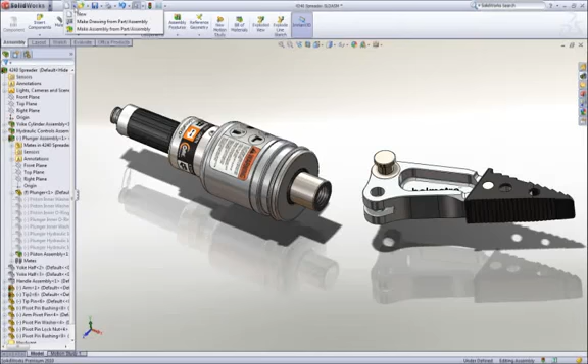The basic building block of a 3D solid model is a sketch, and sketching in SolidWorks is extremely easy and intuitive. Using a mouse gesture, I get access to my most commonly used commands. Draw a slot, add some dimensions to establish its size, and then drag the center of the slot onto the origin to locate it.

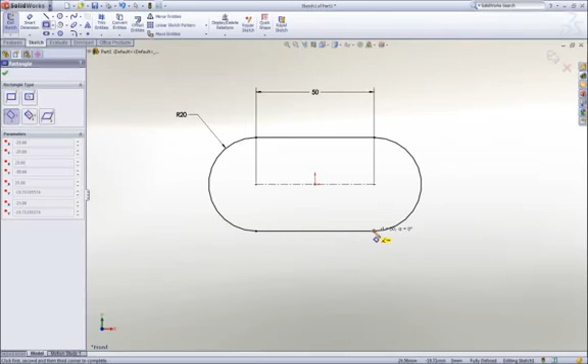Next, a rectangle is drawn using one of the many sketch tools, and then we add a couple of circles to hold the link pins. The two circles should be the same size, so a quick window selection reveals a pop-up toolbar, and an equal constraint is added to lock their size together.

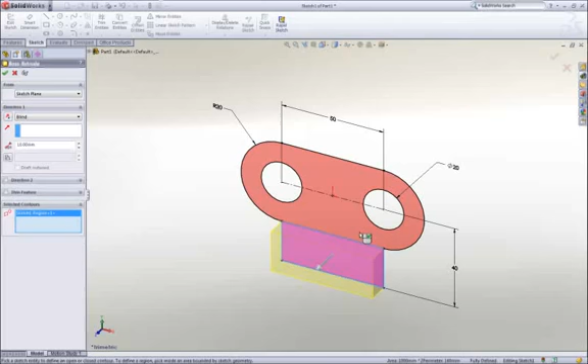Notice that as I work, all of the commands and tools are right at my cursor. We call this our heads-up user interface, which is designed to keep your focus on the screen to make you more productive. Now that this 2D sketch is finished, let's make it 3D by extruding it.

It can be extruded in either direction, or in this case we will extrude it 40 millimeters, about the midplane. To smooth some of the sharp corners, we can add some fillets. Their size can be graphically manipulated on screen, or we can key in a dimension to add some precision.

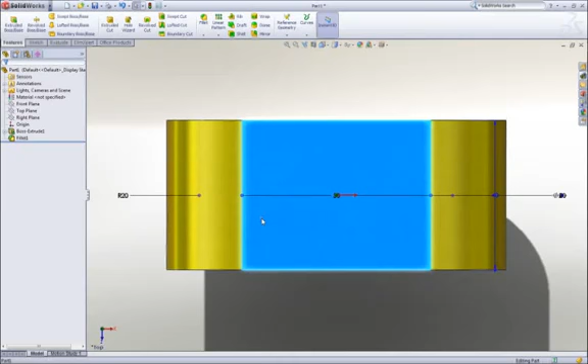Let's add a pocket to the center of the part to accept some links. This time we will use a center point rectangle to capture symmetry while we sketch, and a dimension to control its size.

Using Instant 3D technology, we can add material by dragging the sketch away from the part, or remove material by dragging into the part.

The sharp corners at the bottom of the pocket can be rounded by adding another fillet. 2 millimeters would be good.

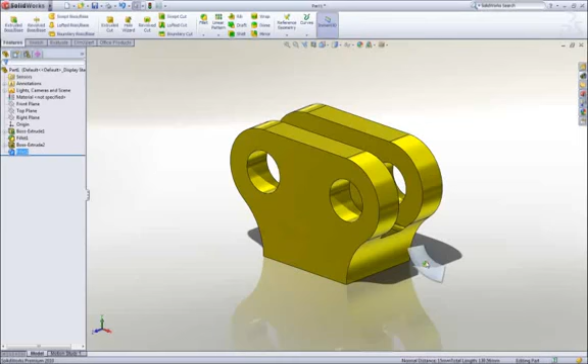Finally, we can ease the outside corners with a chamfer. Using the on-screen feature callouts, we can easily control its size while we create it.

Now that you have the hang of it, we will jump ahead a couple features and add a tapped hole at the bottom using the hole wizard. Gone are the days of looking up hole data, because all of the hole types, standards, and hole sizes are available. Choose the hole parameters, locate it, and SolidWorks takes care of adding all of the proper information to define the hole.

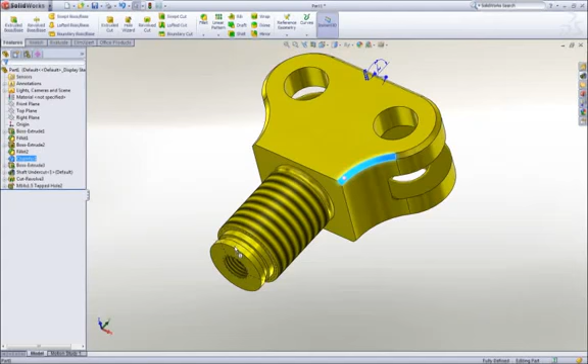Let's leverage our previously created chamfer by dragging and dropping it onto the bottom edge to make a copy. The part looks good, but maybe a couple of changes would help to refine it.

Changing the dimension value changes the geometry, and using Instant 3D technology, dimensions can be dragged and we get real-time feedback of our change. It's important that we fully describe our part beyond just the geometry.

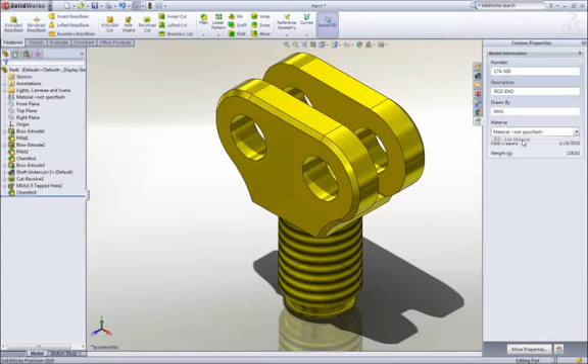Properties such as part number or description can be added and leveraged later in the drawing title block and BOM. Materials can be applied from a list of favorites or from a broad database of materials. All visual and mechanical properties are applied. Notice that the weight of the part has been updated to reflect the new material.

To document our design, let's create a drawing. SolidWorks displays the default views of the part in the View palette. We simply drag a view onto the sheet, then we can create any desired projected views, including an isometric.

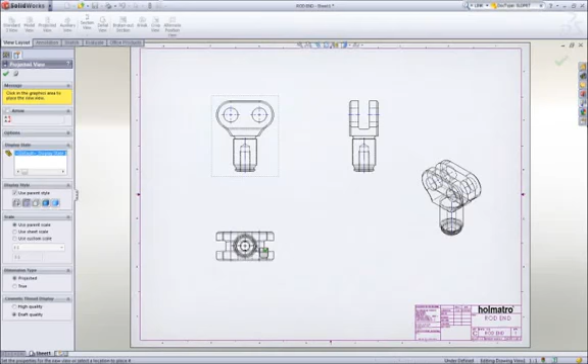Hidden lines can be removed or views can be displayed as shaded. For this part, it would be desirable to create a detailed view of the area near the bottom for clarity.

Adding dimensions is simple. All of the dimensions that were used to create the part are available to be placed on the drawing. Since symmetry was used during design, we can add a couple dimensions to locate the round boss at the bottom. The Rapid Dimension Manipulator appears to properly place and space the dimensions at even intervals.

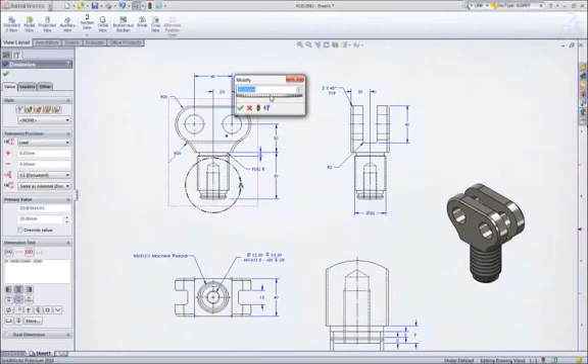Selecting a dimension, we are presented with a dimension palette where we can add more definition, such as tolerancing or formatting. These 20 millimeter holes will not accept the 22 millimeter pins we will be using. No problem—making this change right here on the drawing will update all of the views and change the part as well. Let's move on to some assembly work, and with SolidWorks it couldn't be any easier.

For our rod end, simply drag the round boss and drop it onto the cylinder rod. This adds a concentric assembly mate between the parts. To position it along the axis, we can drag the edge of the rod end to the end face of the cylinder rod to add a coincident mate.

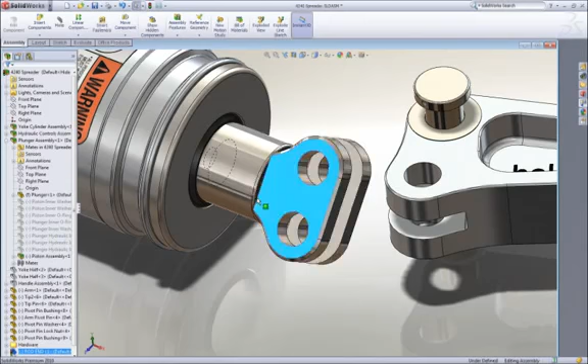Next, we will add a link to stop it from rotating. To find this part, we enter 'link' in the search assistant. SolidWorks not only returns components with link in their file name, but also digs into the part properties to find the term. As before, we can drag this link from the search pane and drop it on a circular edge of the arm to locate it. Then, using the same drag-to-mate technique, we can hook it to our rod end.

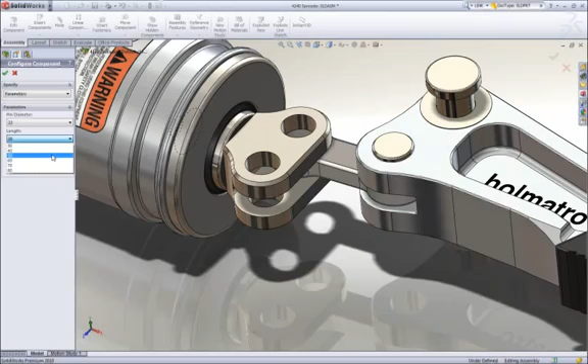From the same search pane, we can assemble the pin. This pin was modeled for multiple uses and contains many sizes or configurations. We simply choose the diameter and length desired, and SolidWorks builds the part to specification.

Most assemblies contain many hardware items like screws, nuts, washers, and the like. SolidWorks provides a toolbox of such items, containing thousands of parts with millions of configurations for your use. Notice that as we assemble the snap ring, it automatically sizes itself to the shaft on which it is placed.

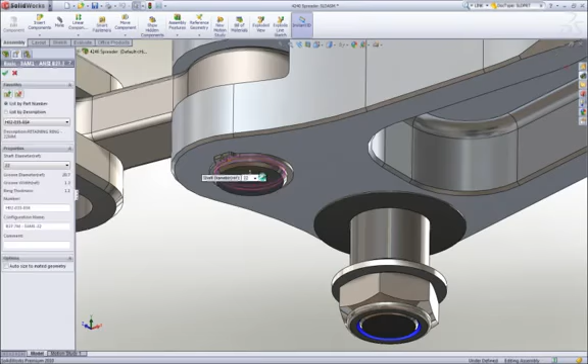SolidWorks allows us to copy parts along with their mates, which is a big time saver. Simply identify the hole and mating face for each hole where the pin is to be placed.

As you can see, these pins are too long for the rod end. Remember, the pin was modeled in multiple sizes, so we can easily change the length of just these two without having to reassemble.

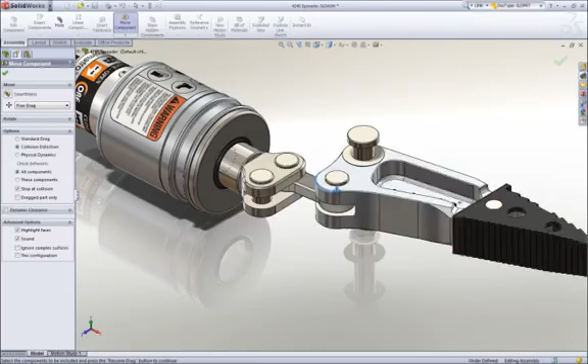Interference detection is an important aspect of 3D design, and SolidWorks takes it a step further with real-time collision detection. Notice that as we move the arm through its range of motion, it interferes with the link. SolidWorks provides both visual and audible feedback of the collision.

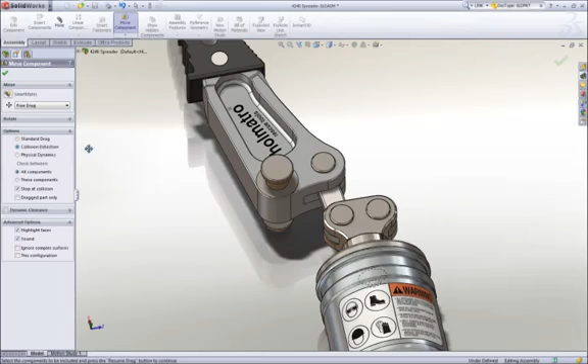A change is in order, and it can be done directly on the part right here in the assembly by changing the angle dimension defining the pocket on the arm. Now, as we recheck for collision, we can see that we have full range of motion with no interferences.

Half of the spreader is complete, and we can save assembly time by mirroring the parts about the central plane to the opposite side. SolidWorks allows us to verify and change the position of each part, and even create opposite-hand versions of individual parts.

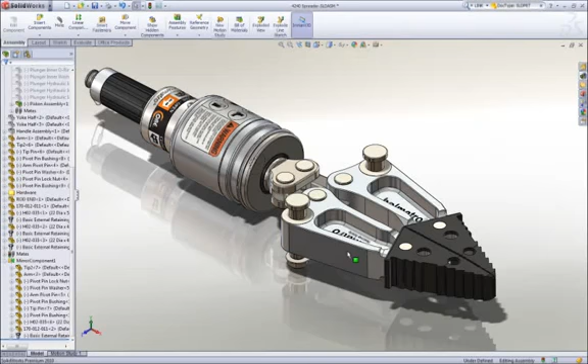In just 2 minutes, 19 parts were added to this assembly, and our assembly task is complete. Let's turn on the parts we previously hidden and document this assembly.

We'll wrap up the demonstration by creating an assembly drawing. As we did when creating the part drawing, we can drag the required views onto the sheet. To better describe this spreader, we will use an exploded view of the assembly.

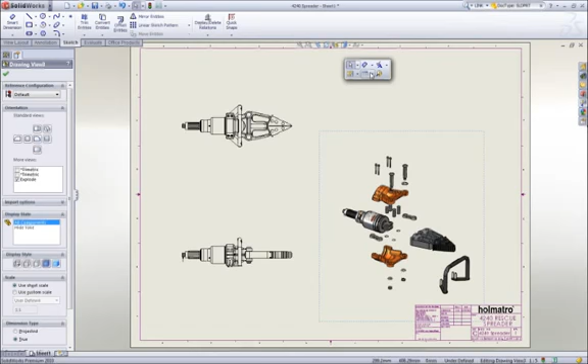No assembly drawing is complete without a bill of material. SolidWorks itemizes the parts, extracts information like description, and adds the appropriate quantities. No bill of material is complete without balloons, and they can be added automatically.

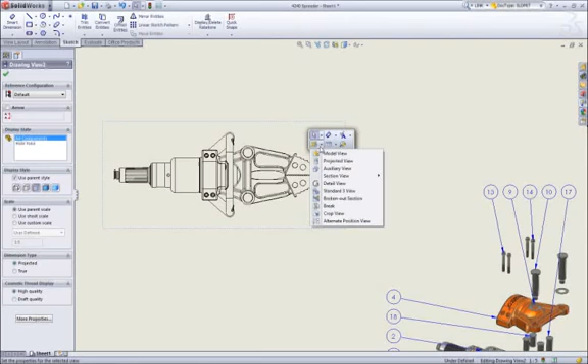To depict the motion of the spreader assembly on a 2D drawing, we can add an alternate position view to describe the assembly in both the open and closed positions. Add a couple of reference dimensions, and our assembly drawing is complete.

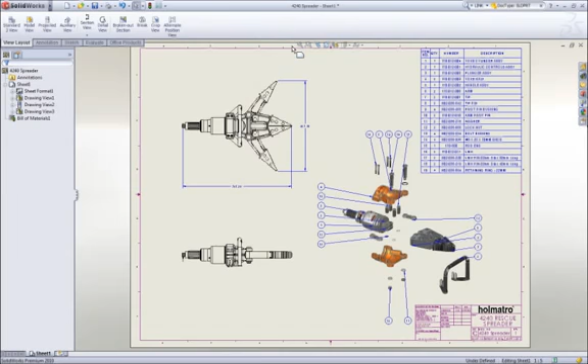We strive to deliver simple but effective tools to help you design better products faster. When you have an idea for a great product, SolidWorks provides the tools to design it in less time and at lower cost. This has been your first look at SolidWorks. To learn more, contact your local SolidWorks reseller or explore our website for more information.